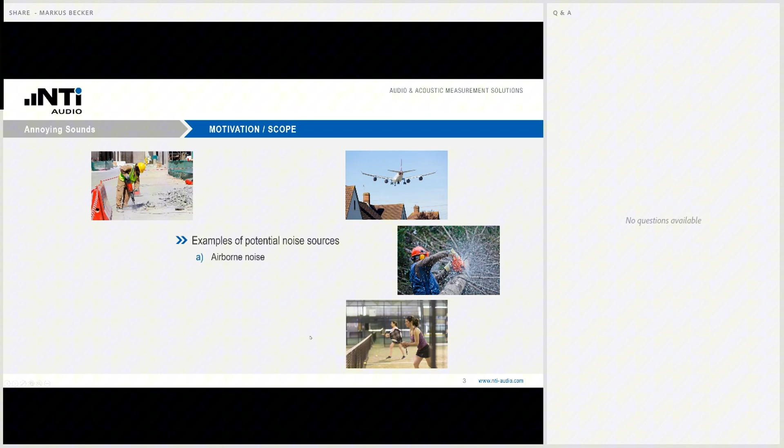Let us first take a look at typical examples of noise sources that can become annoying. Well, maybe the first thing you would think of are a jackhammer, a chainsaw, air traffic, but it could also be sports facilities in your neighborhood where people play paddle tennis, as an example, or other sports which are creating annoying noise. All these sources have in common that this is airborne noise, while there are also other

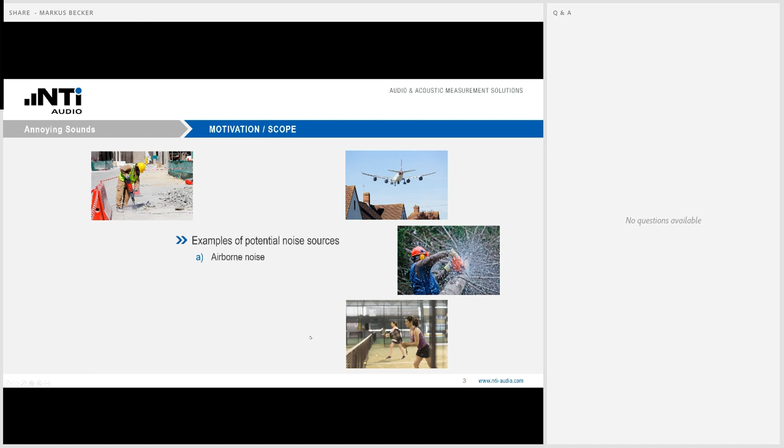sources of annoying noise that are transmitted through the soil, structure-borne noise, typically transmitted via vibrations. This could be stamping on the floor on top of your apartment, or an air conditioning system, or a water tube that is creating annoying sound, or an underground sound that is creating vibrations in the soil and that becomes audible and annoying.

So let us structurize or classify these potential noise sources. And fundamentally, you can put them in two groups. One is the subtle or quiet noise that may sound a little bit awkward, but imagine you are living in a very nice and silent apartment, and then there is some slightly audible but annoying noise somewhere. Well, this will have a major effect on your well-being, although it is, of course, far away from being illegal, but it has an impact.

And the second group is the loud noise, very loud noise that is annoying you. And there we have, of course, the chance to fight it by legal means, and I will come back to that later.

Well, unfortunately, I have to start with bad news, because if you're expecting the silver bullet, how to address this problem, if you're expecting a cookbook, how to solve it, I have to disappoint you, that is not available. Actually, the whole process of identifying annoying noise sources and especially also protecting the people against that is quite cumbersome, can frequently take time. It's a complex task. It's not that easy. So all I can do here in this webinar is give you some ideas, some inspiration on how to address this topic, but it will always be a challenging task.

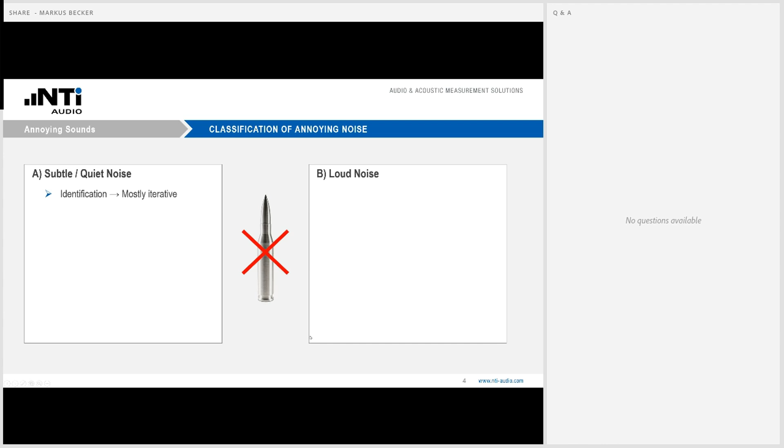Let's start with the subtle noise. The identification of subtle noise sources is typically quite demanding. Mostly it's an iterative process, which means you are looking around, you're identifying a potential source. You have to double check that, you have to verify it. Maybe you will realize that you have been on the wrong path. You have to readdress the topic. So this is typically a rather complex procedure.

Giving you some examples, air conditioning systems, electric control cabinets can cause such annoying noise, water tubes or equipment in your house, or neighbors, so people stamping, voices, music, whatever. These are just examples of sources of subtle or quiet noise. What can you do against that? Very briefly, of course, you can dampen or decouple the sound source. Maybe you can apply some operating restrictions, especially when we talk about electrical installations, or you can improve the sound insulation of your apartment as an example. I will come back to that later.

Talking about loud noise sources, here the situation is a little bit simpler because typically the identification is quite straightforward. To find these sources, typically when you hear that noise, you realize immediately what is the root cause, and then it's just a question about where does it come from.

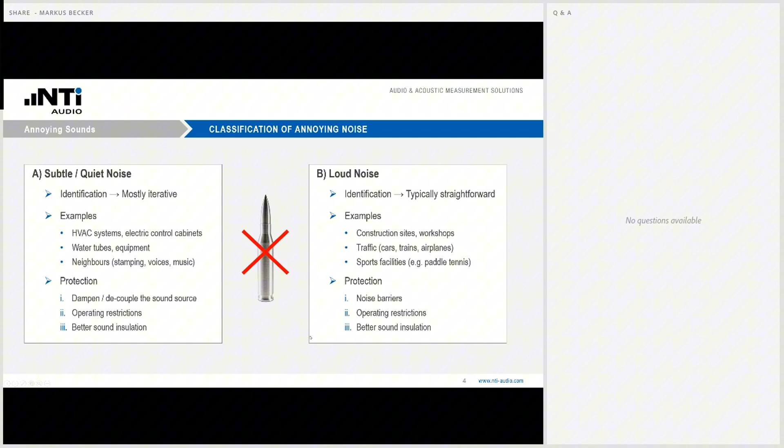Giving you some examples, construction sites, workshops in your neighborhood, can also be traffic, cars, trains, or airplanes, but also sports facilities, as I showed on the slide before, paddle tennis as an example, can be also other reasons. And the protection, a little bit similar to the one before. Noise barriers here is a different approach on a large scale. Again, operating restrictions or better sound insulation could be a solution of your problem or the problem of your customer.

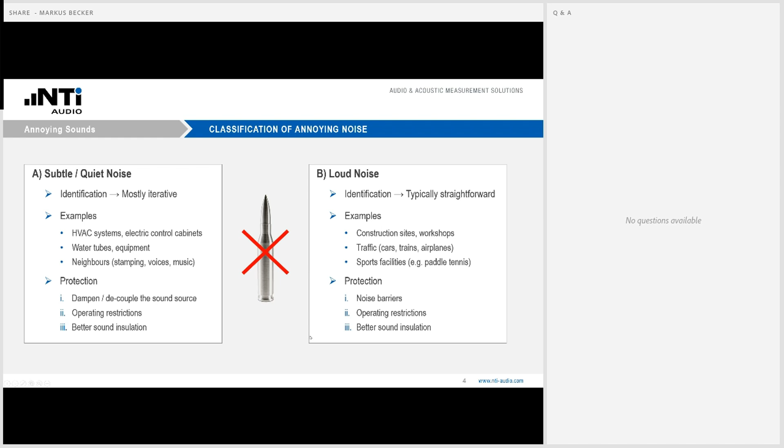Now, let us take a little bit a closer look on the identification of quiet noise sources. In many cases, the majority of the cases, the root cause is hum or vibrations. So that's the most common problem.

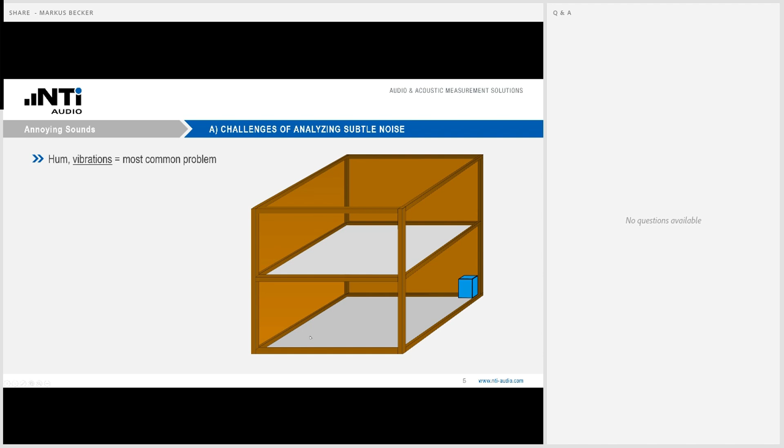And the issue here is that if we look at this schematic graph of a wooden house, we have a source down here on the right bottom corner that is creating vibrations, which go into the structure of this house. And if you take a look at where these vibrations go, it can be that due to resonances, the vibrations are even bigger up here in the top left corner.

So the situation can result in a situation where you have noise coming from this area here, top left corner, while the root cause is in the opposite part of your building. And that shows you that it's really sometimes demanding to identify the root cause.

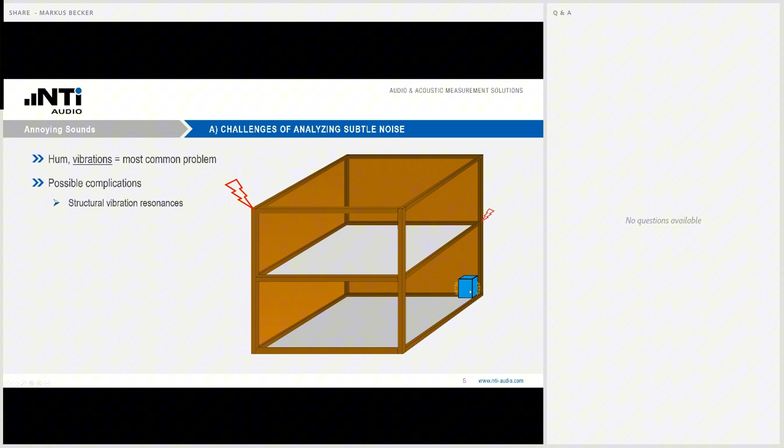Another potential effect can be reflections or standing waves. So that if you're standing in a room and at one spot in this room, you don't hear anything, and moving a couple of meters, you will all of a sudden hear the noise. So where does it come from? This is again making the situation more complex.

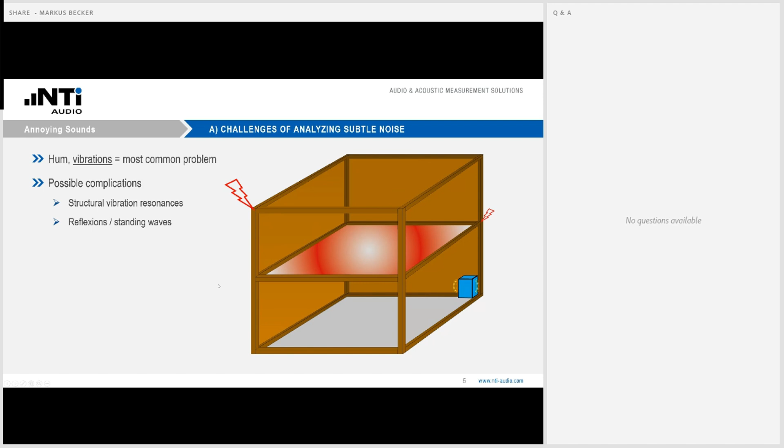And the third, maybe less frequent, but still possible problem you may face is the so-called beat frequencies. For instance, you have two devices that are creating vibration or noise, and these two devices are doing that on almost the same frequency, but there is a slight frequency shift in between. This frequency shift will create the so-called beat frequency.

And the effect is that when you listen to the overlay of these two frequencies, you hear something at a much lower frequency than the original frequency of the devices. So you're looking for something else and don't realize in the beginning that the root cause are these two devices. So this gives you an example on how demanding it can be to identify the true problem of your noise.

Let us summarize how to proceed. It is recommended to first investigate the location and its surrounding, to listen carefully, maybe to put your ear to the wall and see whether you can find out where this noise or this vibration is coming from. And this is, as I stated already, typically an iterative process. You try to identify something, you verify it, maybe you have to research until you find the root cause.

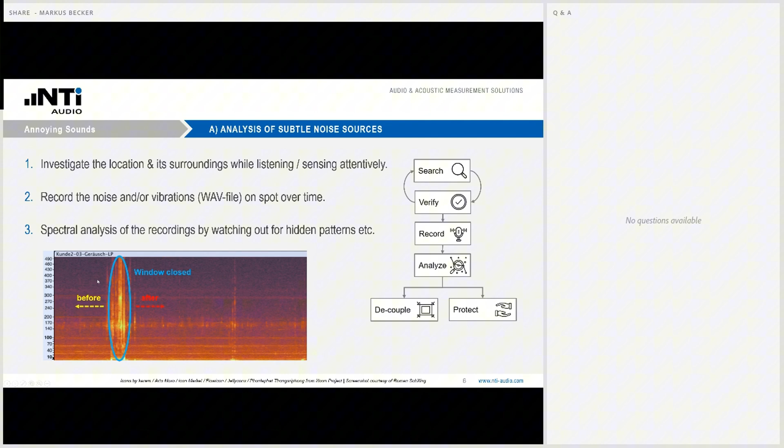Now let's flip over to the second group, the loud noise. What needs to be considered when we are identifying the root cause? What are the challenges? If we are talking about very loud noise, typically you have at least the chance that you can fight it with legal actions.

But first, you need to know, of course, what local rules, what laws are applicable in your area at the location where you are having the problem. And there may be differences whether you are in a residential area or in an industrial environment. So you need to know what is the legal situation on site.

Next, you need to know the limits, the level limits. What needs to be measured? What are the limits? What could you find out? What is a potential approach to go to court? It can be also the statistical distribution.

In some countries, the percentiles of the noise play a role in the legal assessment, or maybe the even most important approach is the tonality or the impulsiveness, which means impulsive noise typically is much more annoying than, let's say, pink noise. So that is another approach you have to follow up under the consideration of what is applicable

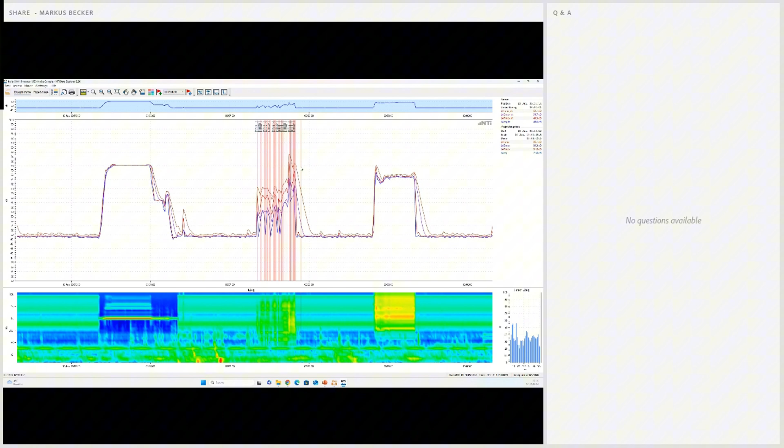And the software assists you in analyzing these impulsive noises and tells you whether it is exceeding the legal limit or not, just as an example. So I go back to my presentation. And just also to remind you, it is of course essential then if you do such a measurement and such an analysis that you create a standard compliant report. So the documentation of your measurement and your analysis must be professional, must be done properly so that the court will accept it as a proof.

Well, next step, what can we do against annoying noise? And this applies both on subtle noise and loud noise. It's quite obvious. The easiest solution would be to fix or to remove the sound source. Unfortunately, in many cases, this is not possible. Talking about traffic noise, for instance. So what else can we do?

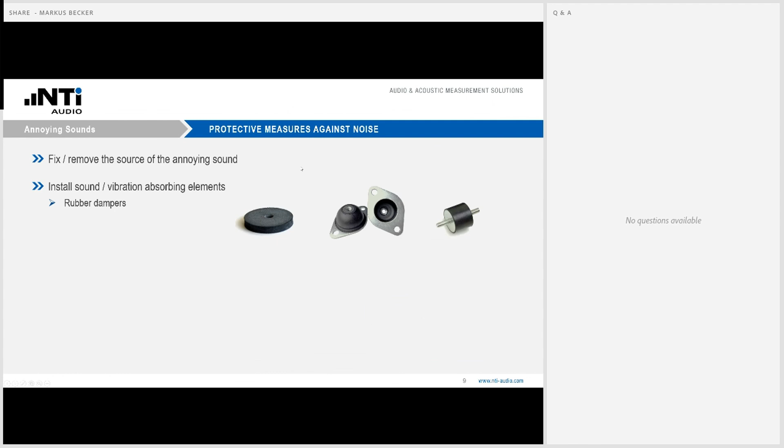Well, in case of machinery noise, as an example, vibrations being created by a heavy machine, we can apply absorbing elements, rubber dampers. They are available on the market in various forms and brands for different uses. So this typically helps a lot to decouple the sound source from the ground.

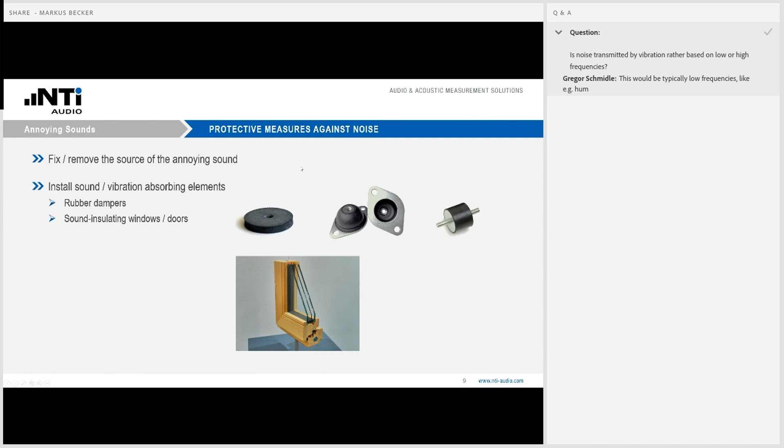Another approach would be to improve the sound insulation of your apartment, to improve the sound insulation of the windows and doors, which is of course costly. Maybe you succeed to find somebody who pays for that, preferably the creator of the noise, but that would be also an approach. And a similar thing applies for noise barriers, a large scale solution, typically found along traffic roads.

Here again, I guess you need to have a good legal argument to force the creator or the responsible entity to install such noise barriers, but that can help, of course, as well. And talking about legal action, just briefly summarizing what I said before, please study the local rules and laws, carry out the measurement correctly, and make sure that your documentation is done professionally.

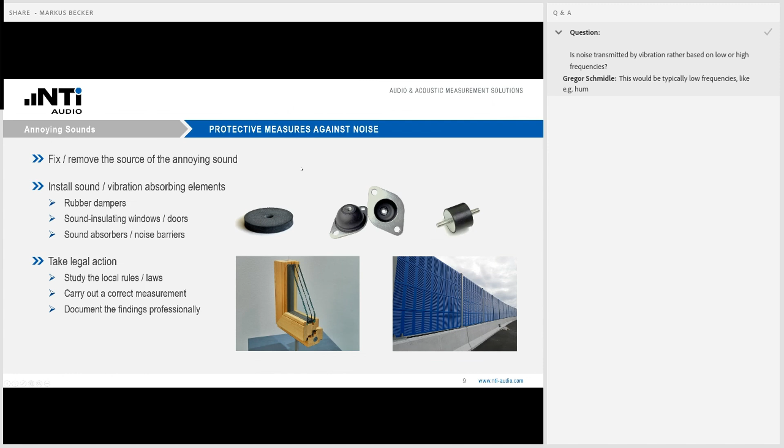So let me flip over to the practical example. And this is a true example that was provided by one of our customers. Thanks at this location for the provision of the pictures. Our customer was called by a person who was suffering under humming noise in the penthouse apartment below this roof.

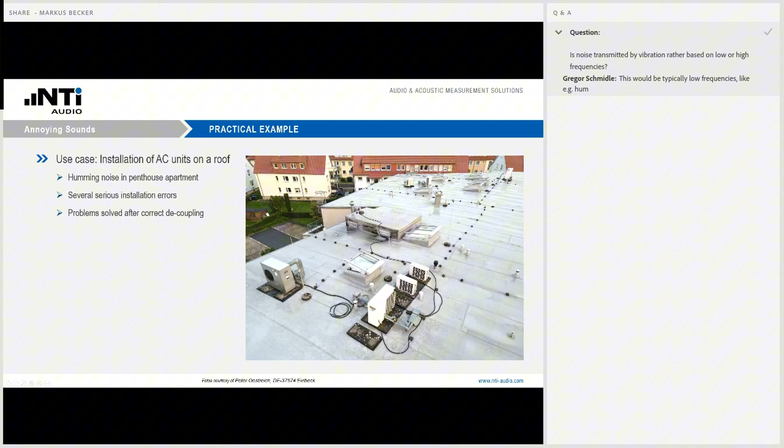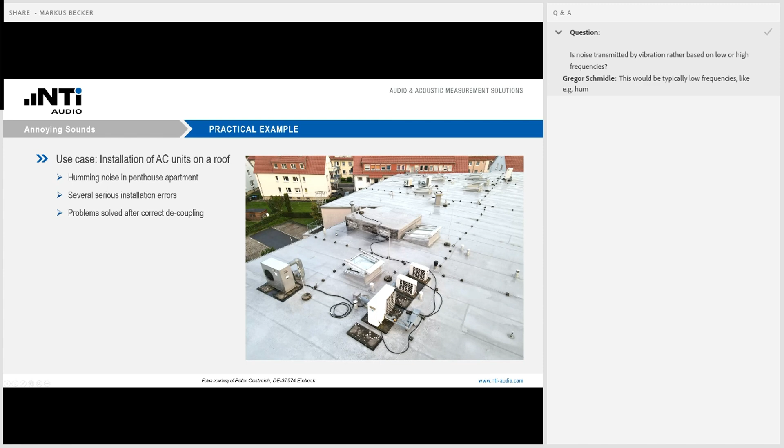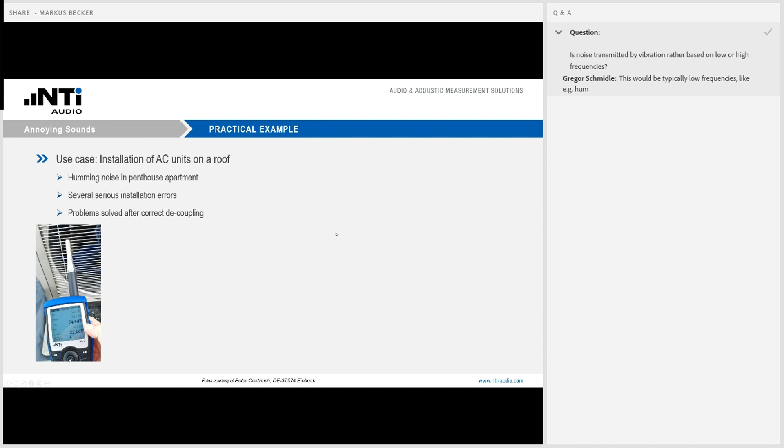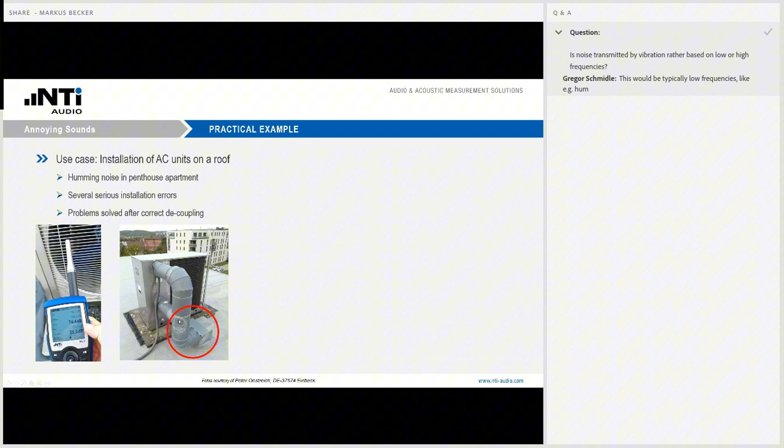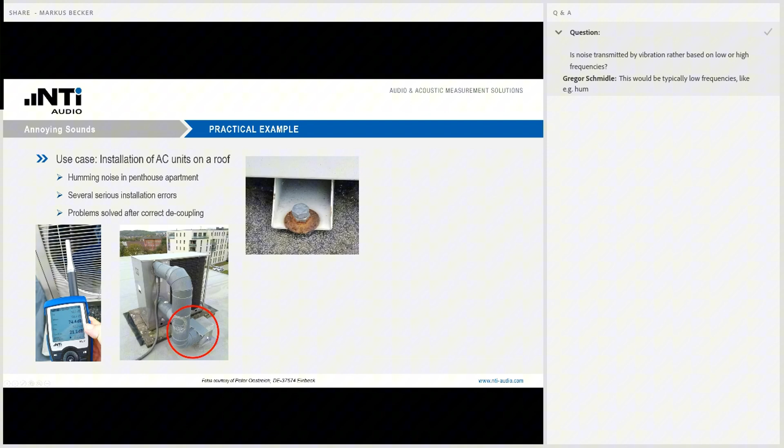But it turned out that here we had, for instance, a coupling problem. This air tube was connected directly to the ground, and the vibrations coming from this air tube were creating a sound below that needed to be decoupled. Similar situation here, the air conditioner was mounted directly to the concrete floor, or ceiling in this case, which is of course a deadly sin. Don't do that, because then all the vibrations from the air conditioner will go directly into the ceiling, creating problems.

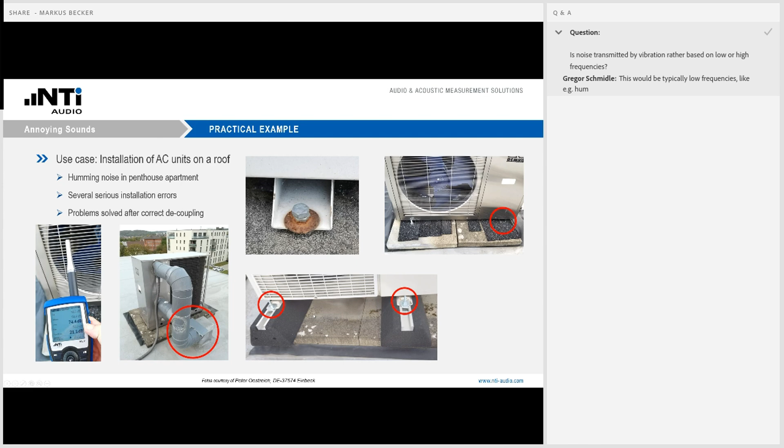Similar situation here, although there were some absorbing mats in between, the mounting was not done properly. There were missing screws and so on. So that was another reason. Here we have a nice example of somebody who tried to do it better by applying really nice thick rubber dampers. Unfortunately, the person didn't do it right, because the screw by which the air conditioner was mounted to the damper went through the damper to the concrete ground. So the whole effect of the damper was gone. To do it correctly, you needed to mount the air conditioner to the damper and the damper at a different location to the ground. Then the damper can be effective.

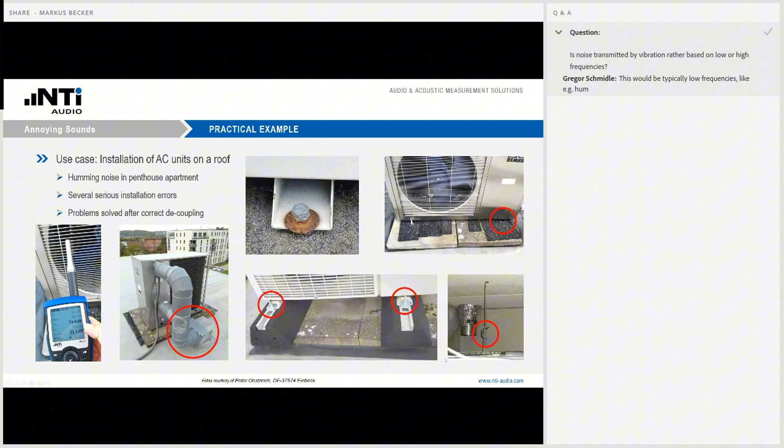Last but not least, inside the building, there was another problem because there was a suspended ceiling, but the suspension was not decoupled as well. So all the vibrations from the concrete ceiling went down to the suspended ceiling. So there was no gain here, and here action had to be taken as well. You can see there are a lot of typical possible problems. You have to investigate that. You have to keep an open eye and see what could be the reason. It's not a simple answer.

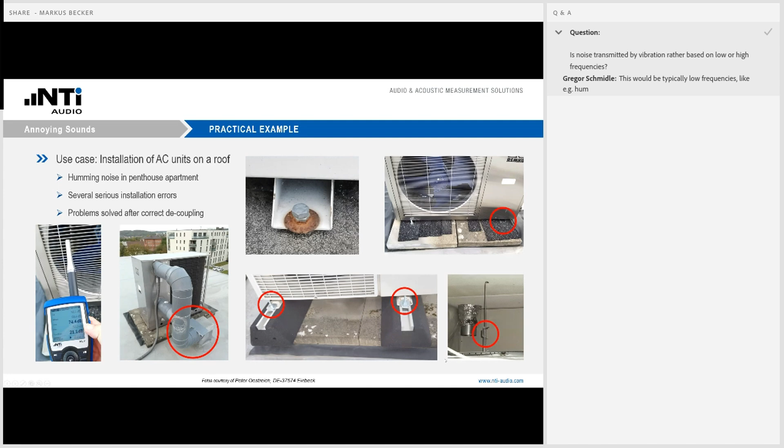I'm giving you a very small example here. It's a very simple presentation. It's not possible for me to show that on a larger scale, but giving you just the idea of how it looks. We have in the room next to mine placed a loudspeaker close to the wall. The loudspeaker is driven from the Minirator with a 50 hertz tone. And here in my room, I have my XL2 with a vibration sensor, and I can show you the content of the XL2 screen on my PC. And this is what I'm going to do now. Flip over to the XL2 Projector Pro.

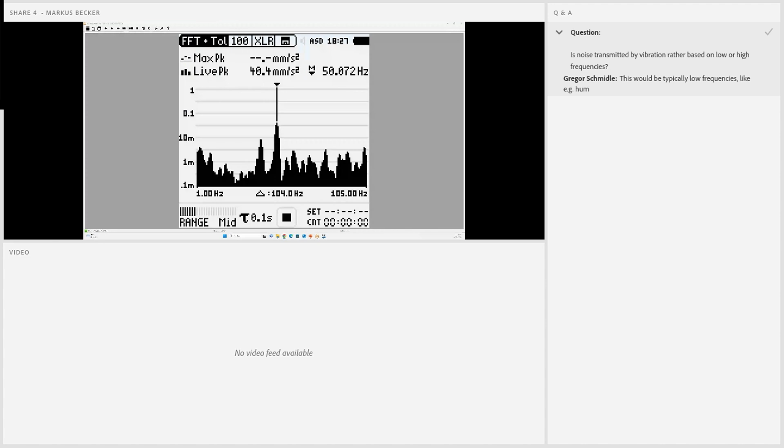Here you see the noise floor, because right now the loudspeaker is not yet switched on. By the way, the noise that it is creating is not too loud. It's just 65 dB at a small distance. So I will now activate the loudspeaker, and you can see immediately what happens. So here you see this peak jumping up that is coming from that loudspeaker. And I want to also show you a little bit more about the setup. Here you see on the top side again the FFT, the spectrum, and below you see the webcam.

And summarize the key aspects of what I presented to you. Whenever you are confronted with such a challenge, you need to do it attentively. You need to use your power of observation. You have to take your time. Maybe you have to think outside of the box to find the root cause.

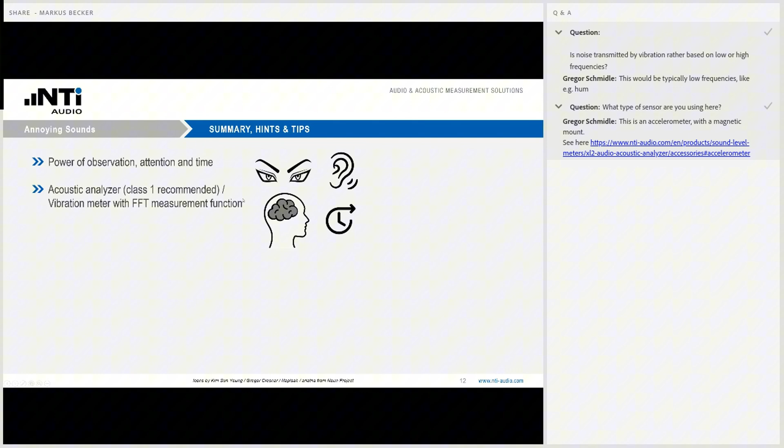A vibration meter is very helpful in many cases, and an FFT measurement function as well, because that allows you to pretty precisely identify the original frequency of the sound source, and that may help you again to identify the source itself. A wave file recorder is also helpful. That allows you to record the acoustic sound or the vibration or both, whatever.